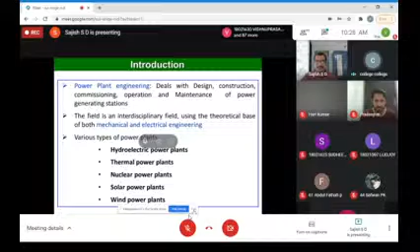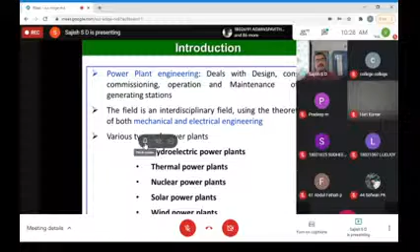So what I was telling is what is power plant engineering. I don't know how much people might have heard, so I will just repeat it again, even though somebody may have already heard it. Anyway, what I want to convey is that this power plant engineering encompasses various disciplines. As I told, it includes mechanical engineering, electrical engineering, instrumentation engineering, computer science - almost whatever field you name, all these people have an opportunity in power plant.

So this power plant engineering includes starting from the design of a power plant, fabricating various components, construction, testing of the components after construction and installation. That means entire commissioning of the power plant, then operating the power plant, then maintenance, and finally the decommissioning. So all this operation basically comes under power plant engineering.

So all this operation involves expertise from various disciplines such as mechanical engineering, electrical engineering, instrumentation engineering, civil engineering, computer science engineering. Almost all the fields are required for the successful operation of a power plant, starting from design to decommissioning. So as I told, whether it's a diploma holder, a BTech, or any other higher expertise, you have a chance in the power plant industry.

So as I told, can you hear? Hello? Yes sir, perfectly audible, okay.

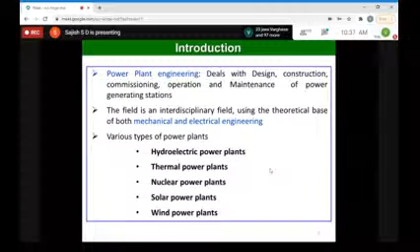Most of the European countries and US, most developed countries, have very high power requirements, as power is a measure of economic growth indicator. As the country becomes more of a superpower - we are planning to be a superpower by 2035 or 2050 - our power production should proportionately increase.

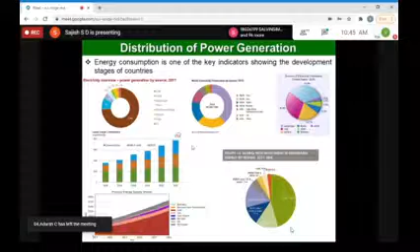Once you want to start more and more industries, more technological firms, and other supporting industries, the power requirement will proportionately increase. That is growth production. Suppose your country is growing by many folds by 2035 or 2050, a corresponding increase in power production has to happen. That is the expectation from our country, and that is the growth and your future in this area.

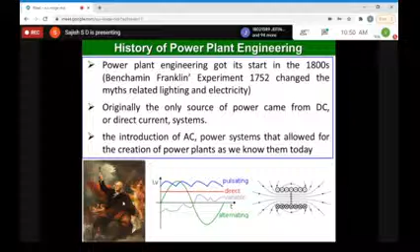This means, regarding your subject and how it is important, you should make a note that if somebody asks what is electricity and how it is generated, you should know. We may not give much importance to all these things, but when somebody is planning to work in this area, he should know all these things as a fresher. So now, power production, AC, DC motor, DC electricity, AC diesel generators, all this was developed between 1750 and 1800, as I told, 1800 to 1850.

And the first hydroelectric power plant, as I told, hydroelectric power plant is one of the oldest power plants in our world. The first hydroelectric power plant started in 1878 in United Kingdom, or England, started by Mr. Lord Armstrong in England.

This idea basically came from the concept of water wheels. Everybody knows what water wheels are. A water wheel is basically an instrument used to produce mechanical or rotational power from the power of water. This figure shows a water wheel in ancient times. Water from a higher elevation, maybe from hills, was taken through pipes and made to fall on the water wheel. It would rotate the wheel, and the rotation was used in grinding mills at that time.

Later, after the discovery of the dynamo, it became known that once we are able to rotate a conducting material in a magnetic field, we will be able to produce electricity. That was the basic idea of the electric generator. With that discovery, hydroelectric power production started with dam, penstock, and generator.

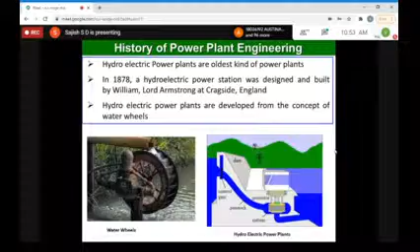Now we come to the basic principle of power plant engineering, which everybody knows: it follows the laws of thermodynamics. We know three laws are there - first law of thermodynamics, second law, third law, and zeroth law. This forms the basis for power production, whether it is a thermal power plant, a nuclear power plant, or a wind power plant. Everything follows the laws of thermodynamics.

What is the first law of thermodynamics? It basically says energy neither can be created nor destroyed, only converted from one form to other. That means in power plants, what we are doing is basically converting one form of energy, whatever it may be, into electrical energy. That is the idea of power plant.

In a thermal power plant, we are converting chemical energy to electrical energy. In a solar power plant, we are converting thermal energy to electrical energy. In a nuclear power plant, nuclear energy to electrical energy. And in wind, we are basically converting mechanical energy directly to electrical energy.

In this conversion from one form to other, we go through different forms of energy. In thermal power plants, energy is first converted to heat energy - this is called burning and producing heat. This heat is further converted to steam, and steam is basically turning a turbine. That means heat energy, the enthalpy of the steam, is converted to mechanical energy.

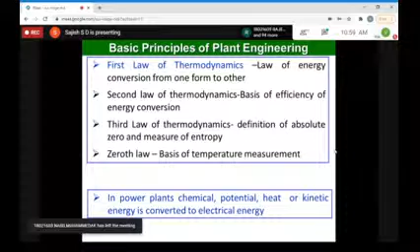Coming again to our hydroelectric power plants, as I told, it was one of the oldest kinds of power plants. And even now, around 17% of the world's power comes from hydroelectric power plants. There are three types of hydroelectric power plants.

One is impoundment, diversion, and pump storage. Impoundment means the power is coming from a dam. You construct a dam, keep your water column at a very high level, and construct a power plant at the lower level of the dam. Here, we are basically converting the potential energy stored in the dam's water into finally electrical energy. So this is a basic conversion of potential energy to electrical energy.

Another type of hydroelectric power is diversion type. Here we have some rivers at a higher elevation, and we simply divert the water flow from that river. We won't construct a separate dam; we simply divert the flow to a generator situated downhill. So from the hill's water source, it will divert, and we get power based on the elevation difference. Here also, the potential energy of the water is converted to electrical energy.

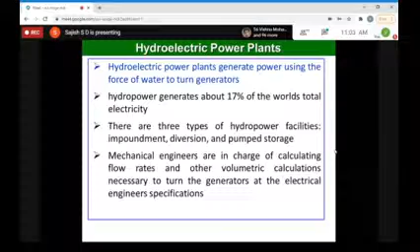So mechanical engineers are playing a major role in hydroelectric power plants. Even a new hydroelectric plant is mainly contributed by mechanical engineers and electrical engineers. Now let's look at some figures to illustrate what I explained.

This is a dam, it is an impound type power plant. From the dam it goes to the power station using a large pipe known as penstock. Here the potential energy of stored water is converted to kinetic energy, and finally kinetic energy is converted to mechanical energy, or the rotation of the turbines, and from the turbine it generates electricity. This is the turbine generator, a cross section of a turbine generator.

You might have studied about different turbines, Kaplan turbine, Francis turbine, all these things. These turbines are used for converting electricity from water. And these are pictures of one of the power plants in the European countries.

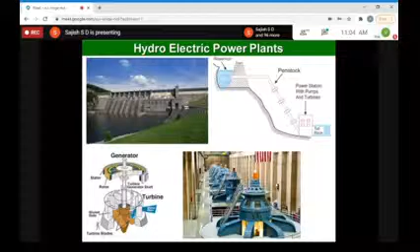Next comes the second type of power plant, known as coal-based or thermal power plants. In thermal power plants, the major contributor, as we saw in the initial slide, is coal. There are other power plants too, like diesel power plants - we have Kayamkulam diesel power plant, and naphtha power plant. But the major contribution energy source is from coal.

What is happening in the coal power plant? The coal will be pulverized and sent to a boiler. In the boiler, this coal will be burned and the chemical energy of coal is converted to thermal energy. This thermal energy is used for heating water. Water will take this heat and become steam - that means water will boil and become steam.

This is what you might have studied in thermal engineering - how water converts to steam, the cycles, the TS diagram, PV diagram of the water-steam cycle, or the Rankine cycle, has been shown here. Most thermal power plants work based on the Rankine cycle, which is a steam cycle where electricity is generated from the power of steam, or thermal energy is converted to electrical energy.

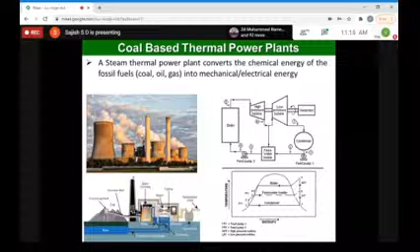People are working in this area, and people are working to develop cooling towers. There are some companies working on the design and development of cooling towers. As you know, all these are mechanical engineering applications.

You should know fluid mechanics, have a thorough knowledge of thermal engineering, strength of materials knowledge, and metallurgy knowledge. All this knowledge together is required to work in this field, whether you are working in the design of the cooling tower, the installation of the cooling tower, or in the area of condenser design, condenser fabrication, condenser testing. People with a diploma in mechanical engineering are required in this area.

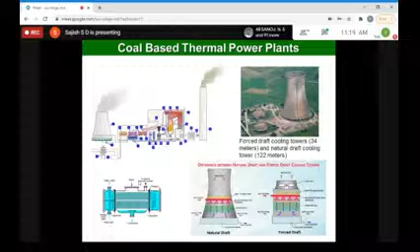Now, another important area we are working on now is nuclear power plants.

Excuse me, can you hear? Hello? Hello? Yes sir, yes sir, yes sir. Okay, so when I continue, I may not know whether it got cut or not, that's why I'm checking on this.

So now we come to the case of a nuclear power plant. As I told, about 10% of the world's electricity is produced from nuclear energy, but in India it is only 2%.

There are so many oppositions in India, but in developed countries that much opposition is not there. People are more knowledgeable in a general sense. Another advantage is that they are not highly populated, and nuclear power plants are generally started in remote areas where the population is very less.

In India, especially in Kerala, the population is very high—almost every place is like a town, like a city like Bombay. So we don't have any place to start a nuclear power plant or a thermal power plant in Kerala. That's another issue with Kerala, so we depend on other states for our electricity.

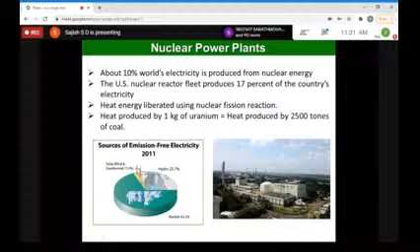So as I told, 10% of world electricity is produced from nuclear power plants, and there are different types of power plants. So whether I am exceeding my time?

Hello? No problem, sir. No problem, sir. Yeah, so I try to... how much time is needed, Sajish? Hello, how much time will it take if it needs to finish now? 15-20 minutes. Okay, or I will rush through, no problem.

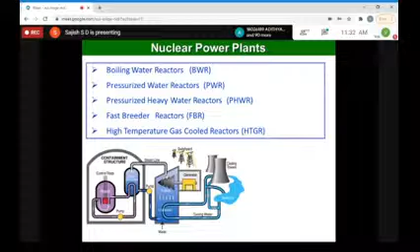Okay, so there are different types of power plants available: boiling water reactor, pressurized water reactor, pressurized heavy water reactor, fast breeder reactor, high temperature reactor. These are the different types of nuclear power plants available, and it basically works on the principle of nuclear fission.

Everybody knows how nuclear fission happens. Very large nuclei like uranium and plutonium are highly fissionable. A high energy neutron hits these materials and it undergoes fission, meaning it breaks into 2 different atoms, and the remaining mass is converted to large energy. This is called the missing mass, and this large amount of energy generated by the breaking of these atoms is taken. This energy is in the form of heat, and this heat is used for boiling the water or converting the energy into a useful form.

Here, you can see this is a chain reaction. Basically one neutron hits one uranium atom, and the breaking of the uranium atom generates many neutrons, and these neutrons hit the nearby atoms, and it goes on like a chain. So in a nuclear reactor, we control these chain reactions and keep them in critical conditions, so that controlled nuclear reaction is used in a nuclear power plant. If it goes uncontrolled, it will become like a nuclear bomb. So a nuclear bomb is nothing but an uncontrolled chain reaction.

In a nuclear bomb, there is a minimum mass required for spontaneous nuclear reaction, spontaneous explosion - that is called critical mass. Nuclear reactors cannot become like a nuclear bomb, as many people are saying, because the critical mass kept in nuclear reactors is much lower than the critical mass in a nuclear bomb. You need a minimum amount of mass, but nuclear reactors work in a below-critical region.

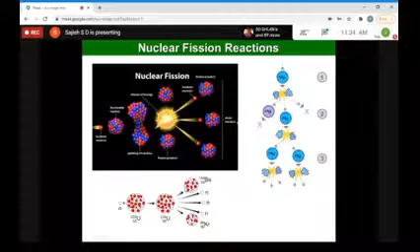So in a boiling water reactor, water is passed through the reactor. In the reactor, the core will be uranium-235, enriched uranium, and controlled nuclear reaction will take place in the reactor, and the heat will be transferred to the water, and water will boil and become steam directly. This boiled water is sent to the turbine, and heat will be converted to electrical energy in the generator - that is the only difference.

So in the nuclear reactor, the only difference is the source where the energy is generated. In coal power plants, coal is the source. In hydroelectric power plant, water power is the source. Here the nuclear energy is used to heat the water. All other parts are called the balance of plant, we will call it. It is the same as all other nuclear power plants.

So here water is boiling, and the pressure of the water will be around 117 bar, and regarding the temperature of water - why are we pressurizing the water? If you pressurize the water, its boiling point will increase. Water under normal atmospheric pressure has a boiling point of 100 degrees. So we may have to pressurize the water to increase its boiling point. That is the basic idea in a pressure cooker also.

We know a pressure cooker works by pressurizing water to increase its boiling point. Similarly, in a reactor, we pressurize the water to get a higher boiling point, around 285 to 300 degrees. The boiled, high enthalpy water produces steam, which is passed through the steam turbines.

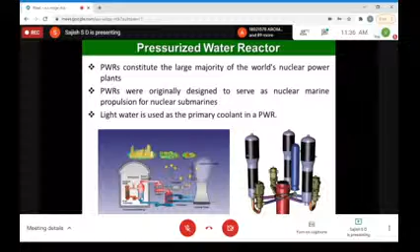So under this pressure, water is heated up to 350 degrees, and it transfers this heat to an intermediate circuit through what is called a heat exchanger or steam generator. The primary circuit water from the reactor transfers heat to the water in the steam generator, producing steam in this second circuit, which is then passed through the turbine.

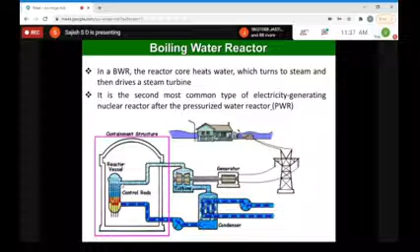That means whatever passes through the reactor core does not go directly to the turbine. In other reactor types, the water passing through the core, which may be radioactive, passes through the turbine directly. But here, the radioactive water is not passed through the turbine; instead it transfers heat to a secondary circuit, and this secondary water boils, with the high enthalpy steam used to generate electricity.

Here is a picture of the cross section of a nuclear PWR, a very compact reactor. This reactor was discovered in the USA by a national laboratory along with Westinghouse, and was originally designed to be put into nuclear submarines. Nuclear submarines run using such pressurized water reactors, and our nuclear submarine is also now running with one.

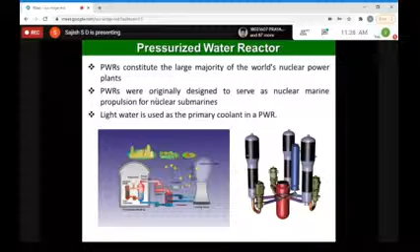Next is the pressurized heavy water reactor. This is not the most common globally, but is very common in India, where most reactors are of this type. It differs from the pressurized water reactor in that heavy water is used here as the moderator and coolant, whereas in the boiling water reactor and pressurized water reactor, normal water is used as the coolant and moderator.

Moderator means moderating the neutrons. We have to slow down the neutrons to improve efficiency. The fast neutrons coming out of a chain reaction have high energy, which must be slowed down to hit the next fuel element; otherwise these neutrons escape. So to improve neutron efficiency, we slow them down, a process called moderation. In the pressurized water reactor and boiling water reactor, normal water is used as the coolant and moderator.

But in the pressurized heavy water reactor, heavy water is used as the coolant and moderator. Heavy water is deuterium oxide, deuterium being an isotope of hydrogen, hydrogen having three isotopes: hydrogen, deuterium, and tritium. Deuterium oxide is used in place of normal water to create heavy water, which has a higher atomic weight and is much heavier than normal water. This heavy water is used, and this circuit shows the pressurized heavy water reactor.

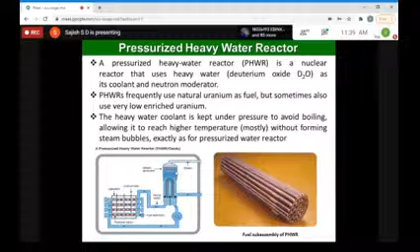The third type is the fast breeder reactor, where the neutrons are not moderated. Fast neutrons are used for generating electricity and creating the nuclear fission reaction. The reactor we work with here in Kalpakkam is basically a fast reactor. Here the coolant used is not water; we use sodium as the coolant. The primary sodium coolant transfers heat to a secondary loop, again through a steam generator, which takes the heat.

Water will take the steam heat from the sodium, become steam, and it will again go to the turbines. It is like a balance of plant, same as all other power plants. Only the power plant difference comes in the source of heat. Here nuclear reaction transfers the heat to primary sodium.

Primary sodium will transfer the heat to the secondary sodium loop, and the secondary sodium loop will finally transfer the heat through a heat exchanger to generate steam, and that steam will be transferred to the turbine to generate electricity. And this is how the reactor core will look like.

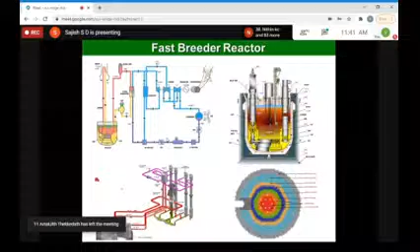It will not only generate electricity, it is creating more fuel also by breeding. That's where the word breeder comes from. I am not going into the details because of lack of time.

Another, third reactor is the gas cooled reactor. This is an emerging type of reactor where gas is used as the coolant. Earlier it was water and sodium; here gas will be used. Graphite will be the moderator, and it can go to even very high temperatures.

This is basically in the order of temperature. As I told, in the pressurized water reactor and boiling water reactor, temperature of the water is in the order of 300 degrees. In fast breeder reactor, temperature of the sodium is in the order of 500 degrees centigrade. In high temperature gas cooled reactor, temperature is in the order of 1000 degrees.

So here there is more complexity. As the temperature increases, the design of the components, everything becomes more and more complex. So that is one challenge in designing this type of reactor.

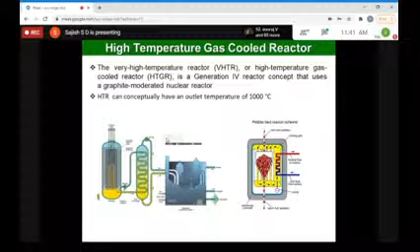These are the basic power conversion cycles in use in the various plants, already explained. If it's a gas turbine, we will be using the Brayton cycle. If it is a normal steam turbine, we will be using the Rankine cycle. So Rankine cycle, Brayton cycle, the importance of these two cycles comes in handy in understanding the power plant operation.

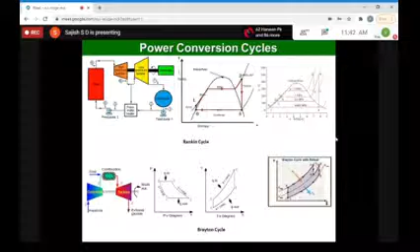Now come to the important point: the role of these engineers, mechanical engineers, diploma holders or B.Tech degree holders. They have a very important role to play in these power plants. I explained many things in the introduction, and in that way it encompasses so many roles.

First is design of the nuclear power plant. Next is construction or fabrication of the components. Once components are fabricated, they have to be put in some place, and you have to construct the nuclear power plant. All these steps are common for any type of power plant, whether it is a nuclear power plant, thermal power plant, or a coal power plant. The requirement is the same.

So we need people who will be able to design the various components of the power plant. That design also includes two types: one is conceptual design, one is detailed design. Once the design is over, these design drawings will be given to the people fabricating the various components.

Various industries, ancillary industries are there who will be responsible for fabricating the components required for the power plant, like boiler, pressure vessels, piping, condenser, cooling tower, turbines, various systems.

Hello. No problem, sir. Hello? It was a participant. No problem, okay, no problem. I thought somebody was trying to say something.

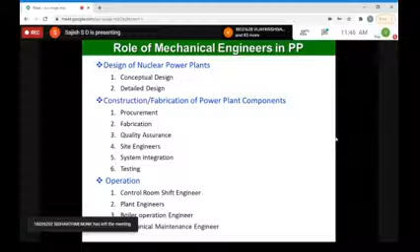As I told in the conceptual design, first is planning. We have to plan what type of power plant we are going to construct, whether nuclear or thermal. That design includes what type of concept, what size, what is the capacity of the power plant, and what should be the position of different equipment, the layout.

You have to have good knowledge about drafting, AutoCAD, computer-aided design, and 3D walkthrough. You should be able to visualize things, and people knowing 3D simulation software are well in demand. You should have better knowledge about AutoCAD and design drawings, understanding drawings. This is all very important even at the planning and layout finalization stage.

For piping layout, we may have to finalize it. For equipment layout, we may have to finalize it. The preliminary design has to be finalized.

Once you have the conceptual design, only then the detailed design will take place. That means you have now arrived at the size of the nuclear power plant, almost all the components, and their location. Now you have to do the detailed design of each component: pressure vessel, piping, condenser, cooling tower. Full knowledge about heat transfer, thermal engineering, mechanical, metallurgy, and strength of materials are very important in pressure vessel design, boiler design, heat exchangers, and piping systems. All this knowledge and skill is very important.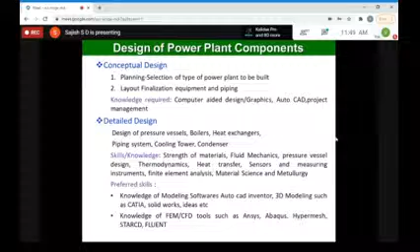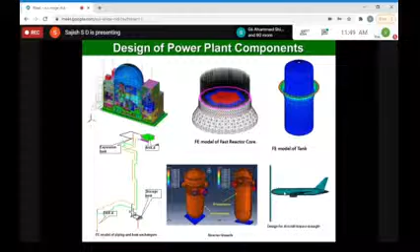Now comes some figures I put for understanding the design of nuclear systems. This is a pressure vessel, this is the piping system, and these are some simulations. Even our reactor has to be designed for aircraft impact, so we may have to do aircraft impact simulations. All these things, high-end simulation, we may have to do. And then the knowledge about material, metallurgy, materials, strength of materials, everything will come in this. So that subject knowledge is very important.

Then comes the fabrication, as I told, first is procurement. So for procurement, we have to make a detailed specification. There also you should know about the systems, then only you can make a detailed specification. So knowledge about this and understanding the specification, and send that for indent. Once it is placed, that indent, then comes to the fabrication.

And that means you are now on the fabrication floor. Suppose you are getting an order from a big power plant industry to construct some component, and you are now put up as the person overseeing this job. So you should understand, you should be able to read the drawing, and understand how the drawing basically tells what. So understanding of drawing and translating to a product is very important. Who can understand the drawing and drawing conventions, maybe projections, right angle, front view, isometric view, all these things you should know. Then only you will be able to communicate with the worker doing this fabrication operation. So you will be put as a supervisor for this job. You should have knowledge on all these aspects.

Then you should fabricate this item, and various operations like welding, forming operation, welding operation, forging, everything will come in this. So that activities has to be done.

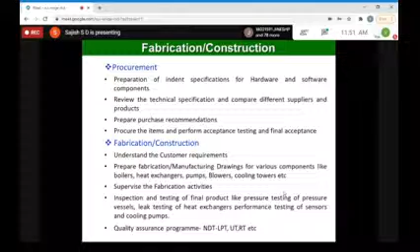Then finally comes the inspection of the components. Component has to be inspected. Then quality assurance - we'll do some non-destructive testing like liquid penetrant testing, ultrasonic testing, radiography testing. Some people will be working in quality assurance, and there also all these NDT techniques will be used for testing the components. Component testing is also very important - it will be tested at high pressure. Suppose it's a pressure vessel, the testing will be done at 1.25 times the design pressure. That way testing will be carried out.

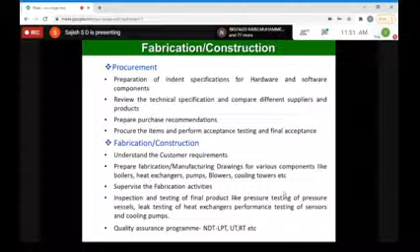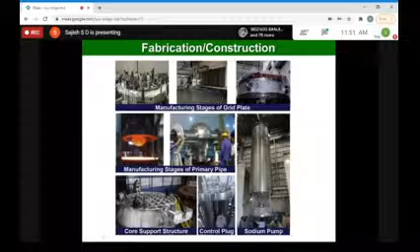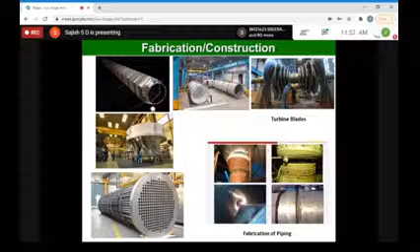Then these are some turbine cross sections. These are the heat exchangers and some welding of the pipe. Welding also - different types of welding based on the material, what type of welding rod has to be used. All this knowledge is very important in fabrication.

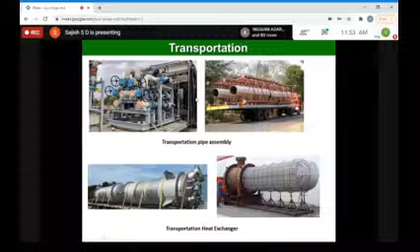Then comes fabrication, we have to do transportation. Transportation also an involved job - you cannot simply transport. There are so many guidelines to be followed for transporting various large equipment, and it has to follow some rules, and that rules has to be followed. This item, a large heat exchanger, how it is transported - even the transporting structure design is an important part. You have to design a structure so that the component should not get undue vibration during transportation, and the component should not get spoiled by the transportation. So transportation is very important.

Some components we will not be able to turn back - that is not allowed. So the person should know everything about the component. Only then can he handle it. Full knowledge is required to handle this component.

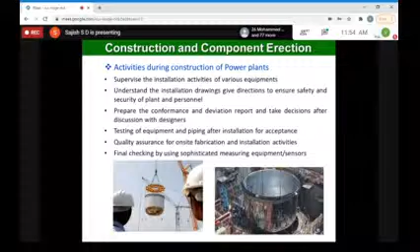Site engineers and mechanical engineers will play a major role in the erection of components. We can see how complicated the piping system in a power plant is, and most of this piping system is done at the site itself. Site engineers have to oversee fabrication and erection activities, and after erecting, finally there has to be integrated testing - meaning none of the welds are failing and nothing is leaking. All this testing has to be done by the engineers.

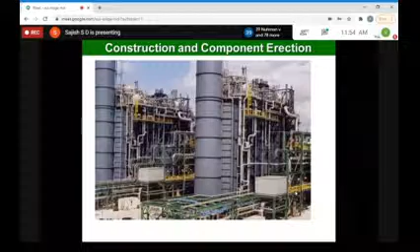So all these job requirements will arise when a new power plant is being built. This many people are responsible for different aspects. They will come here, and only with their permission and supervision can things proceed. If something goes bad, we cannot go back - the whole power project has to be stopped. It is very costly equipment, so getting that thing again is very difficult.

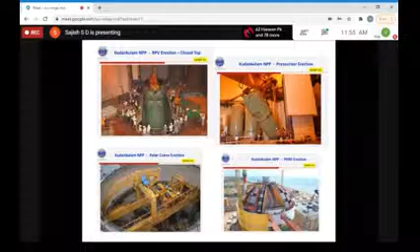This will make the program itself not viable - you will not be able to produce power cheaply. So it is very important to handle this component without any accident and without damaging it.

Similarly, after installation and testing, the main part coming is the operation of the power plant. As I told you, the control room engineer has to play a major role - he is basically the brain of the power plant. He should be able to take important decisions while the power plant is operating.

You will get some variations, some signals which may indicate something. So you should know the entire checklist before starting a power plant or a reactor. Various checklists have to be checked and passed, and only then can you start a power plant from the shutdown condition.

During operation, many signals will be coming - somewhere temperature showing very high, somewhere an alarm will come. Based on the alarm and sensor indication, the control room engineer should be able to take decisions. He may have to take quick decisions, and some of these decisions he may have to convey to his superior or to the maintenance people. He is the person doing all this operation.

Above that, one senior person, the plant engineer, supervises the entire operation from the control room. He interacts with the control room people as well as the maintenance people, and only with his permission is the next action taken. If the problem is much more severe, higher level authority comes into action, and based on their command, further decisions are taken on continuing the operation or shutting down the power plant for maintenance.

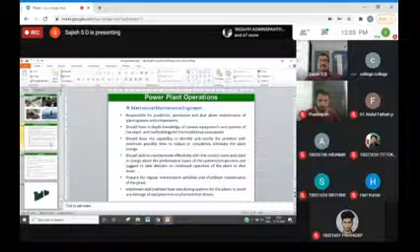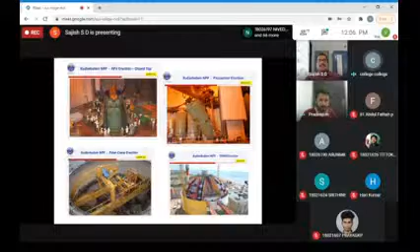So what I want to say is, after the installation, mainly it is the operation of the nuclear power plants. So the operation engineer or the control room engineer has to play a major role in this. They are the brain of the nuclear power plant, where they have to take important decisions for the continuous operation of the plant.

As I told, if the reactor or the power plant gets shut down due to some undue issues, a lot of money will be lost. Per day, around crores of rupees will be lost. So the main important thing is that we should be able to take important decisions to prevent any unwanted shutdown.

So the person, the control room engineer, should be skilled enough to take important decisions. He should be able to understand various signals coming from various sensors, and accordingly take decisions. Or if he is not able to take a decision, he should be able to properly communicate with his superior, or with the maintenance people, on what action should be taken - whether to continue with the operation, reduce the power production, or shut down the reactor. So this type of thing, only the control room engineer can take decision.

For that, he should have good knowledge about the entire process of the power plant, and knowledge about the various sensors - what the signal means, what the various signal indications are, what the alarms mean. So these people will be continuously trained in their respective department, and they will get good exposure to all these things. Every time they will be trained, checked, and requalified. Only then will these people be posted in this post. That means this is a very responsible post.

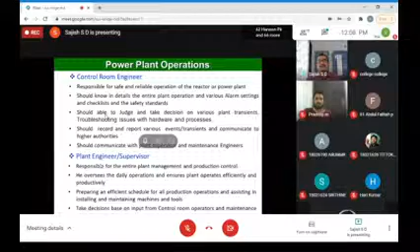And in a power plant control room, around 2 to 3 people will be there per shift. You know that the power plant operates on a round-the-clock basis. So every shift, some people will be there, and after that the shift will change. So they are the people running the power plant on a 24 into 7 hour basis.

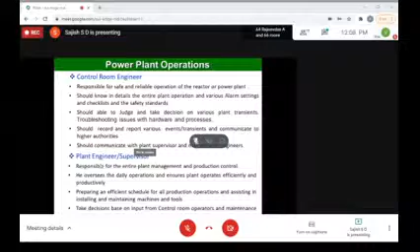Another post is the plant supervisor. It is a higher post, who will be basically interacting with the control room engineers and the maintenance people, and he will be responsible for the entire plant. Maybe 1 or 2 people will be there, and the supervisor will be responsible for the entire plant operation, and he should be able to take decisions based on input from the control room engineer and maintenance, to continue the operation, or follow various plant management protocols and production control. Everything he will be taking care of.

And he is the person who will be preparing the schedule for various operations - first we have to do this, then whether we have to reduce the power, and whether the power demand is coming down, the peak production is...

So there are power plants operating in two types - peak load operation and base load operation. Base load operation power plants will always be operating at base load and will continue to operate that way. Peak load operating power stations will vary the power operation based on the demand of the grid. When grid demand comes down, they will automatically reduce the power production. Accordingly, based on the demand, the rate of power production will increase or decrease.

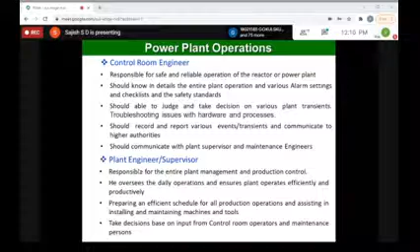So the plant engineer or supervisor has to take care of all this scheduling of power production, and take the decision on whether to continue with the power production, or in case some unexpected event happens, whether to go for an unplanned shutdown. That decision he has to take, or if he's not in a position to take the decision, he has to communicate with his superior - the station director - and based on their input, we have to take the decision.

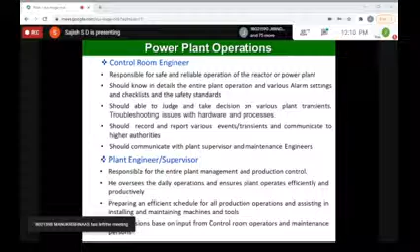Hello, can you hear? Yes sir, okay.

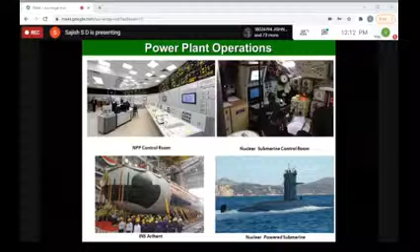So these nuclear power plants not only provide power, they also help propel various defense applications. Different sizes of power plants help meet not only energy demand but also various strategic applications. Next comes the important job, the final job: mechanical maintenance of the nuclear power plant equipment.

Here, the maintenance engineer should be very knowledgeable, very skillful, and able to understand the problem quickly. Once a problem comes up in a power plant, these people will immediately be sought, and they have to attend to the problem; your skill helps identify it easily. If you are more skillful, you can understand and rectify the problem within a short time, which means you are saving crores of rupees for the power plant.

Suppose you are not skilled or knowledgeable enough, that means you may have to shut down the power plant and look for some other knowledge base from outside. By the time that person arrives, two to three weeks or even a month might have gone, and you can see how much money has been lost for the power plant operator.

So operators always try to keep a set of very skillful maintenance people who have in-depth knowledge about various systems and equipment, how the equipment is working, and what signals coming from it mean. If you are a skillful person, just by hearing the sound itself, you can understand what the problem is, whether it needs urgent maintenance or can wait until the next plant shutdown.

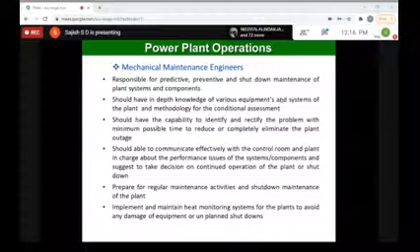In summary, energy consumption is a key indicator for our development and growth. A country aspiring to become a global power or developed nation needs a proportionate increase in energy consumption. As per Niti Aayog's power projection, we need around 7 to 8 times the power we are producing now by 2040 and 2050, meaning we need that many more power plants over the next 20 years. A major portion of this will come from coal and nuclear energy.

For coal, new technologies are under development, such as ultra supercritical power plants, which will be launched very soon at various locations. The government of India has also sanctioned around 10 nuclear power plants at various locations, and the Nuclear Power Corporation of India is now starting the work for this.

I came to know from top people at NPCIL that there is a huge demand for people with diploma and degree qualifications in mechanical engineering. They are looking for people with a good understanding of the subject so they can be put on the job at the site with minimum training. There is a huge shortage of manpower in this area, and they want people with these skills and knowledge at both the diploma and degree level.

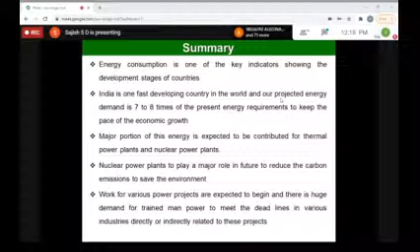I wish all the people may get a job immediately after finishing their degree or diploma. Thank you for your patient hearing.